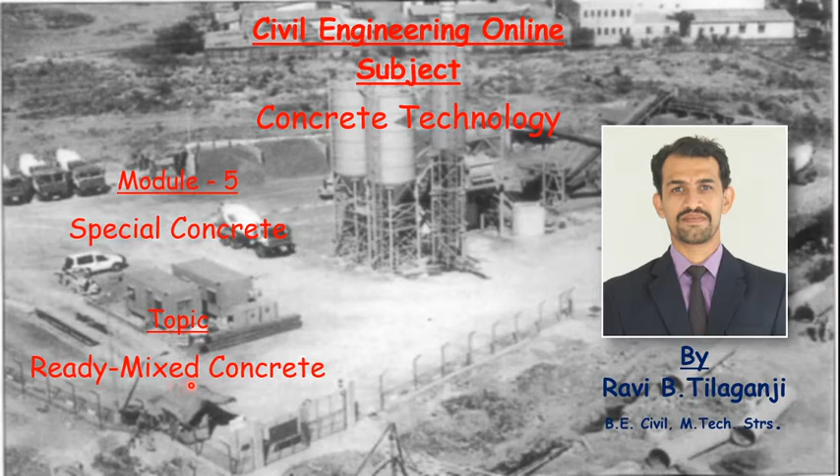Ready mix concrete (RMC) is a specialized material in which cement, aggregate and other ingredients are weigh batched at a plant in a central mixer or truck mixer before delivery to the construction site in a condition ready for placing by the builder. Thus, fresh concrete is manufactured in a plant away from the construction site and transported within the requisite journey time. The RMC supplier provides two services.

Firstly, one of processing the materials for making fresh concrete, and secondly, the transporting of the product within a short time. So, concrete is totally mixed and prepared at the plant only, then it is taken to the site, wherein at the site we have that particular mixer and then we place it at the particular place.

Sometimes materials such as water and some varieties of admixtures can be transit mixed, known as transit mixture, that is they can be added to the concrete at the job site after it is batched to ensure that the specified properties are attained before placement.

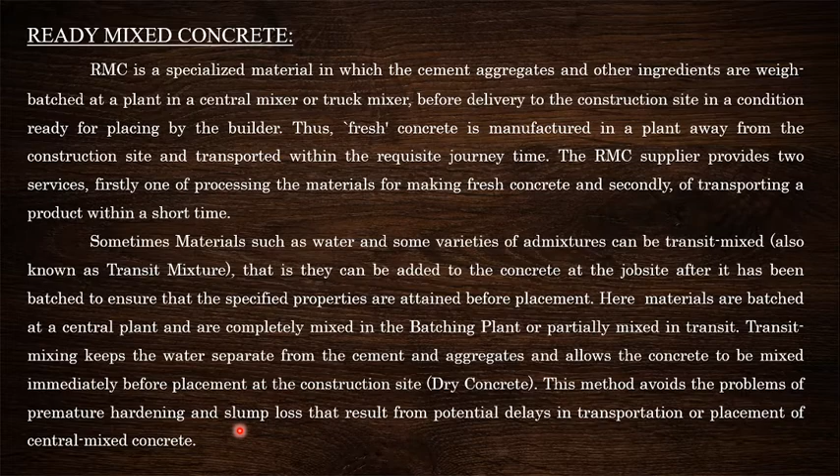Here materials are batched at the central plant and are completely mixed in the batching plant or partially mixed in transit. Transit mixing keeps the water away from the cement and aggregate and allows the concrete to be mixed immediately before placement at the site. This method avoids the problem of premature hardening and slump loss that results from potential delays in transportation or placement of centrally mixed concrete. Transit mixing allows concrete to be hauled to construction sites further away from the plant.

There are several types of RMC plants varying in type of mixing and production capacity. These RMC plants are generally available in capacities varying from 15 cubic meter per hour to 200 cubic meter per hour. A typical RMC plant you are able to see here. This is a transit mixer. Here is the control panel. This is the material feeder.

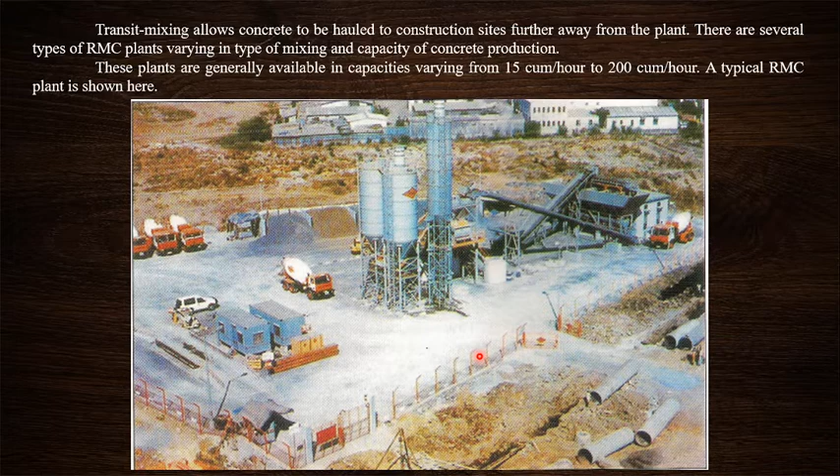Here is the cement, and this is fly ash. Beside it you are able to see the mixing. These are the belt conveyors where the materials are conveyed for mixing, and this is the particular chamber wherein material quantity is available, and from this remote control area the whole batch is controlled and mixing or preparing of concrete is done.

History of ready mix concrete. The idea of ready mix concrete was first introduced by architect Jurgen Heinrich Magens. He got his patent of RMC in Germany in 1903. In 1907, he discovered that the available time for transportation could be prolonged not only by cooling fresh concrete but also by vibrating it during transportation. The first concrete mixed off site and delivered to a construction site was effectively done in Baltimore, United States, in 1913, just before the First World War.

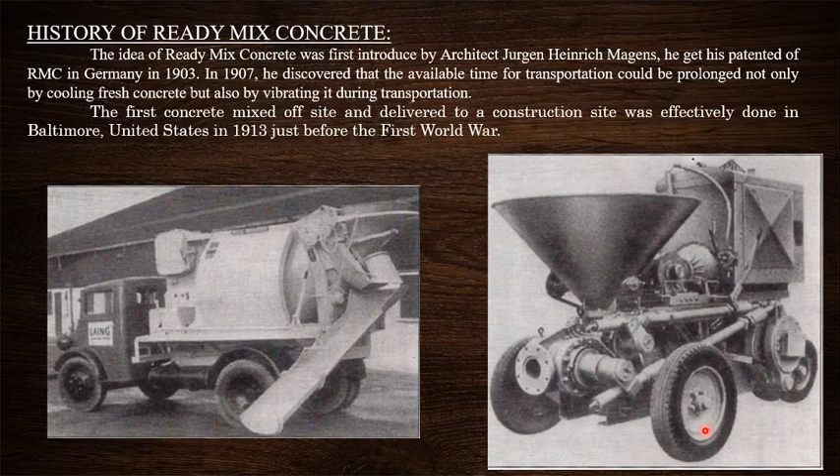So these are the vehicles used as mixers, transit mixers and mixing equipment for ready mix concrete for the first time. In India, ready mix concrete was initially used in 1950 during the construction of dams like Bhakra Nangal and Koyna. At constructions, the transportation of concrete is done either manually or mechanically using ropeways and buckets or conveyors.

Ready mix concrete at Pune in the year 1991. These plants were later allowed to sell ready mix concrete to other projects also. Thus, ready mix concrete was successfully established sometime after 1994 in India. As per the available record up to 2003, there are around 76 RMC plants in 17 cities, having a capacity of around 3875 cubic meter per hour, producing 3.8 million cubic meter of concrete per year.

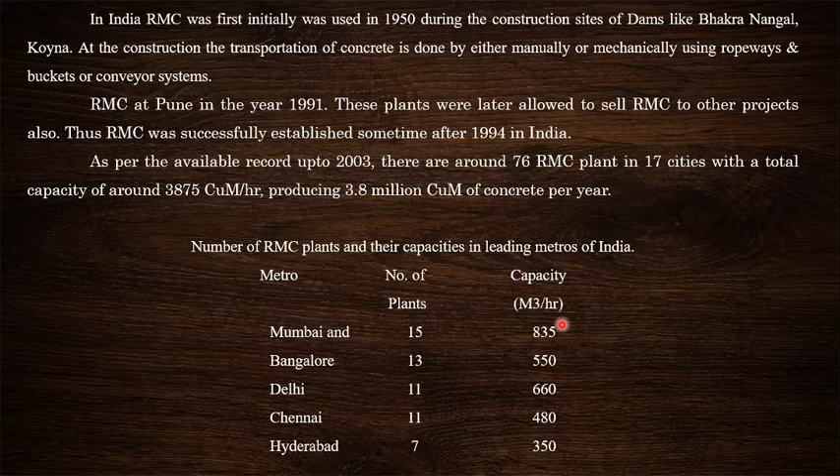So these are some metro cities having ready mix concrete, the number of plants and their capacities, wherein ready mix concrete is available. Still some more have been developed nowadays. We have a number of ready mix plants within distances of about 5 to 10 kilometers.

Use of ready mix concrete. So use of ready mix concrete, how we are going to use it. So the ready mix concrete is prepared at a particular site and we call it a producer plant. So it is not mixed at the site. It has considerably less wastage of material, whereas it has more wastage of material when it is mixed at the site.

Most cities have very little space for storage. For that reason they use ready mix concrete for concreting particular sections, places or construction sites. Obtaining RMC at site can reduce supervision and labor. So usually where labor is not available, we can use RMC, wherein the requirement of labor can be reduced, instead of batching and mixing of the concrete at site.

Many cities and sites house their workforce on the site itself to reduce the time and cost of daily travel. This creates unsafe, unhygienic conditions. So unsafety and unhygienic conditions are there with concrete which is mixed at the site. We can reduce that with the use of ready mix concrete.

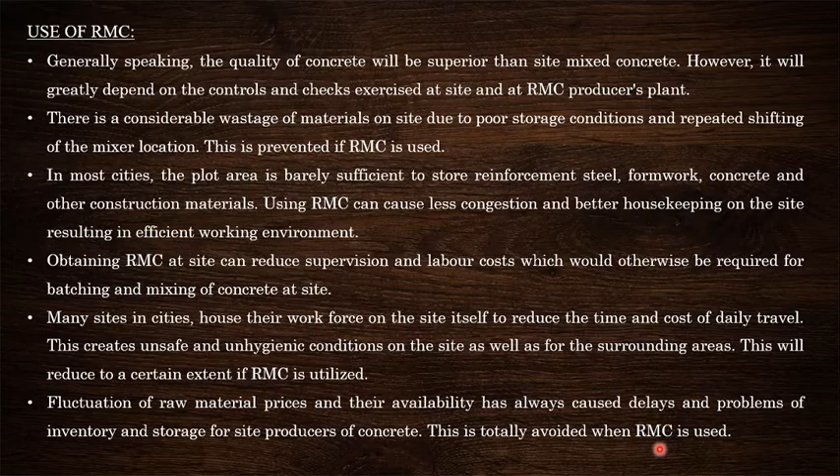Fluctuation of raw materials. Sometimes we have the total amount of material, sometimes we don't have availability of that particular material, so a shortage of material will cause concreting to stop in between. In ready mix concrete that is not going to happen, because the quantity of concrete required is ordered from the producer. Availability of labor gangs, this was already discussed.

Problem of inspection, checking and testing all concrete. We have to check every time. Every time we are not able to get good quality, good quantity of concrete at the site when we are preparing it. But if we prepare at the plants, we are able to have concrete of the same quantity and same quality throughout the whole batch whenever the mix proportion is placed. So concrete is totally controlled: variations, materials, everything.

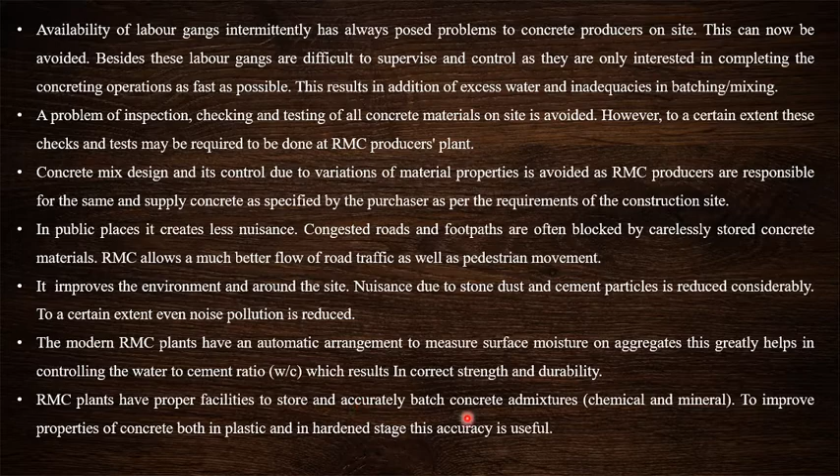Water cement ratio is also controlled, resulting in strength and durability of concrete, and RMC plants have proper facilities to store and accurately batch concrete admixtures, chemicals and minerals to improve properties of concrete both in plastic and in hardened state. This accuracy is very useful.

In general, RMC plants have superior and more accurate batching arrangements than the batchers used on site. Ready mix concrete plants are superior mixers than the rotating drums which are usually used at normal sites. Ready mix concrete plants do batching and mixing efficiently, which cannot be achieved at the site.

Ready mix concrete encourages mechanization and new technologies like pumped concrete, bulk transportation of cement, production of self-compacting concrete, high strength concrete, high performance concrete and so on. New materials like micro silica, fibers and other admixtures are also available in ready mix concrete, which helps with reinforcement, detailing, safety, strength, scaffolding and staging.

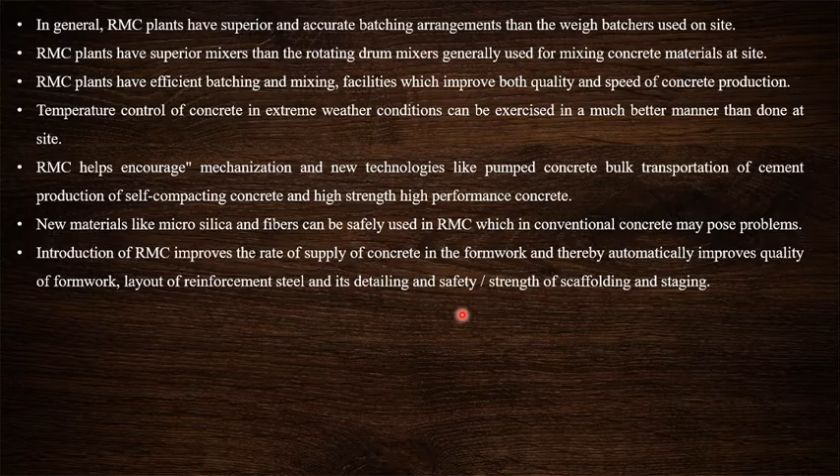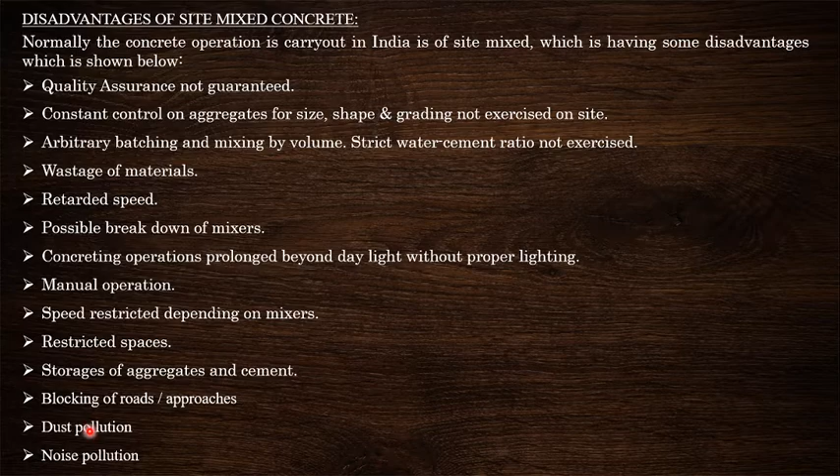Possible breakdown of mixers. Concreting operation prolonged beyond daylight without proper lighting. Manual operation. Speed restricted depending on mixers. Restricted spaces, storage of aggregates and cement, blocking of roads and approaches, dust pollution, noise pollution.

Types of batching plants. In ready mix concrete there are two types of batching plants: centrally mixed concrete or wet batch mixer, and truck mixed concrete or dry batch mixer. In centrally mixed, it is totally prepared at the plant itself, and the wet concrete is taken to the site. Whereas in truck mixed dry batch, the concrete is mixed, water is kept separate, and when it reaches the site, the particular amount of water is added and it is delivered.

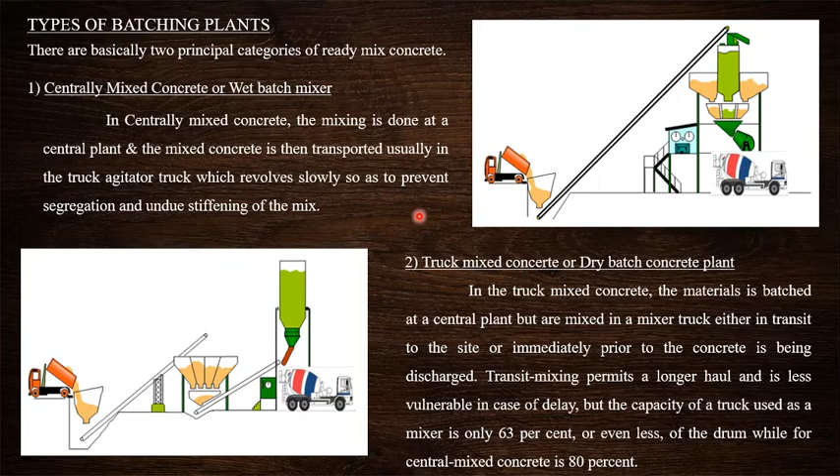63 percent of transit truck capacity is used for the material, and centrally mixed has 80 percent of wet concrete available in the machine. Batching and mixing in the plants covers how we store the material, batching, measuring and recording equipment, mixing equipment, control systems, electrical, hydraulic and pneumatic drives, and conveying systems such as belt or screw conveyors.

Storage of materials. Cement is generally stored in silos. The loading of cement is done with the help of a pneumatic system, either installed on bulk carriers or a separate system available at the plant. If bagged cement is used, then the cement is loaded using a compressed air loader and a splitter unit.

Cement is weighed separately and is transported from the silo into a mechanical or electromechanical weigher by means of a screw conveyor. Here we can see one of the cement conveyors. This is the pumped cement part. We can clearly see this is the Ambuja cement vehicle.

Water is generally stored in tanks located close to the plant. It is accurately measured by a water gauge and microprocessor control system. Consistency of a mix is generally checked by visual observation, later confirmed with a workability test like the slump test. However, in modern plants, consistency of the concrete mix is checked by an automatic remote recording system, which is easy and more accurate.

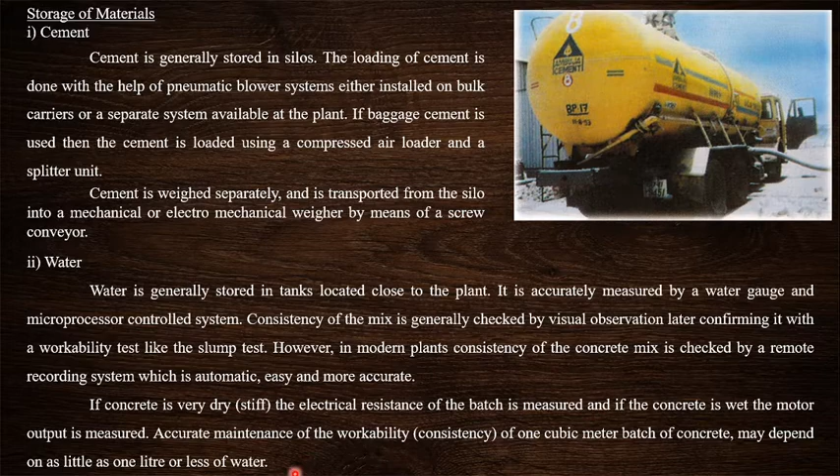If concrete is very dry and stiff, the electrical resistance of the batch is measured, and if the concrete is wet, the motor output is measured. Accurate maintenance of workability consistency of a 1 cubic meter batch of concrete may depend on as little as 1 liter or less of water.

Aggregates. The storage of aggregates is done in various ways depending on the type of plant. There are basically three types of plants generally in use. Vertical production: in vertical production, aggregates are stored above the batching and mixing elements in one or more silos. These plants are not suitable for relocation at short intervals of time. As the aggregates are stored in the silos, it is relatively easy to protect the aggregates from very low temperature in the winter period.

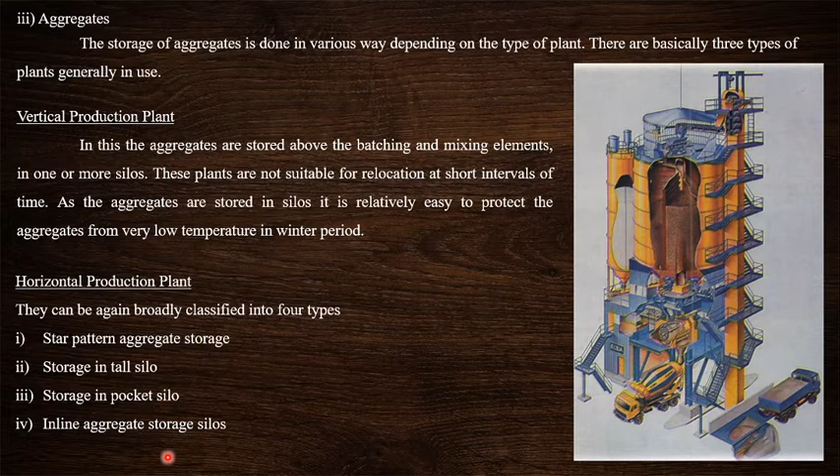The star bin storage of aggregates is most popular in India, basically because of climate conditions. The aggregates can be stored exposed to ambient temperature in different compartments forming a star type of pattern. A storage capacity of 1500 cubic meters is possible in this type. In the star pattern, aggregates are stored in 4 to 6 compartments. So in a star, how many compartments do we have? Usually 5 compartments, so 5 aggregate sizes are used. So minimum 4 to 6 compartments are made and they are stored.

They are bulked at a 45 degree flow angle against the batching plant's bulkhead and partition wall of the compartments using a boom type dragline loader. So there is a central pyramid, and the pyramid shape edges separate it, so we are able to have a 4-star type storage. Dragline operation is done either fully manually, semi-automatically or fully automatically, with fully automatic dragline loader systems.

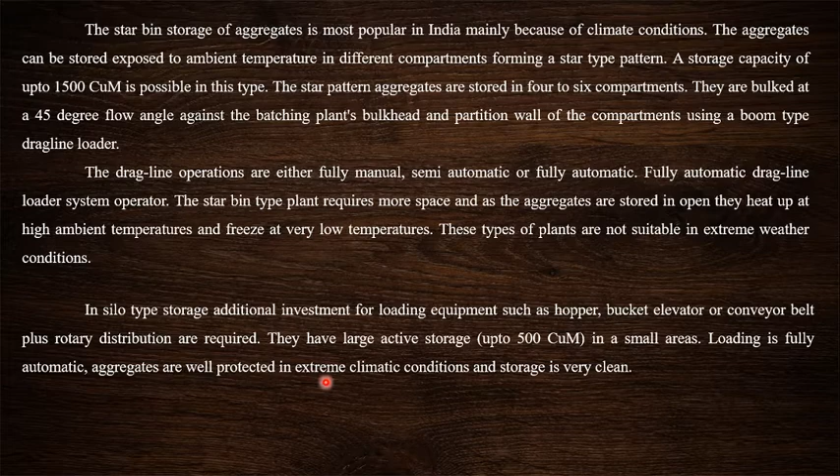The star bin plants require more space, and as the aggregates are stored in the open, they heat up at ambient temperature and freeze at very low temperature. This type of plant is not suitable in extreme weather conditions. In the silo type, additional investment in loading equipment such as hopper, bucket elevator and conveyor belt plus rotary distribution is required. They have large active storage up to 500 cubic meters in small areas. Loading is fully automatic, aggregates are well protected in extreme climatic conditions and storage is very clean.

Mixing arrangements: there are various types of concrete mixers used on the concrete production plant. The two basic types are free fall mixers and power mixers. Most of our indigenously manufactured plants have free fall mixers only. Free fall mixers consist of a rotating drum with blades fixed on the drum's interior. As the drum rotates, the material inside is lifted and dropped. The drum is loaded and emptied by changing the direction of rotation or by tipping it.

Most of the imported plants have power mixers. A power mixer sets the material in motion positively. The materials get thoroughly mixed by rotating arms. These mixers have shorter mixing time and give better homogeneity, consistency and strength to the concrete. Besides, they have better facility for inspection. The following are the most common designs.

On the left side is the blade mixer arrangement. So this is the single shaft drum and this is the double shaft drum, wherein double mixing blades are provided, and here single mixing blades are provided. Usually we see this type of drum at normal concreting sites, and the other type we see at sites where the most important works are going on.

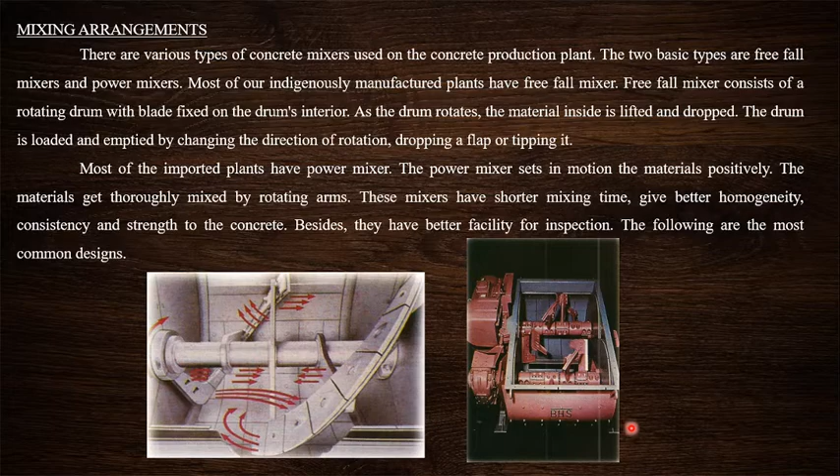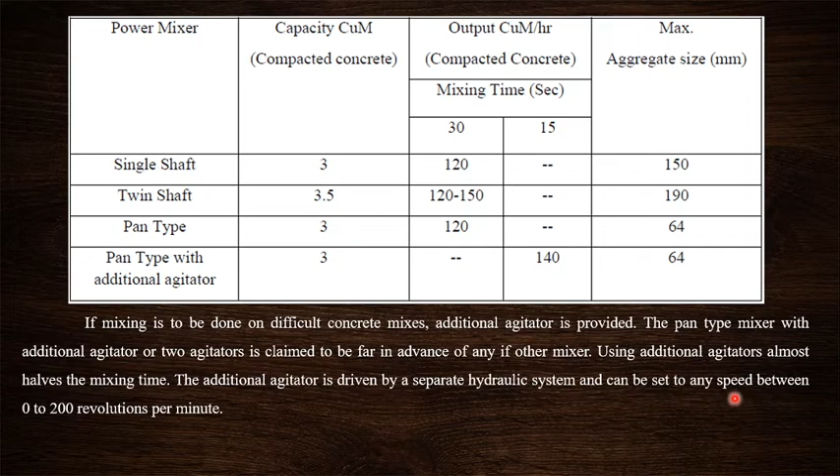If mixing is to be done on a difficult concrete mix, an additional agitator is provided. The pan type mixer with an additional agitator or two agitators is claimed to be far in advance of other mixers. Using additional agitators almost halves the mixing time. The additional agitator is driven by a separate hydraulic system and can be set to any speed between 0 and 200 revolutions per minute.

Control systems: these are the control systems which we are using at the plants for better quality control, higher economy and superior working conditions. Fully automatic plant control systems with multiple inputs of 120 mixes or template control systems are used. These controls are operated from the main desk. It also has a material availability monitor, printer plus additional batching monitor, and the entire plant can be operated by

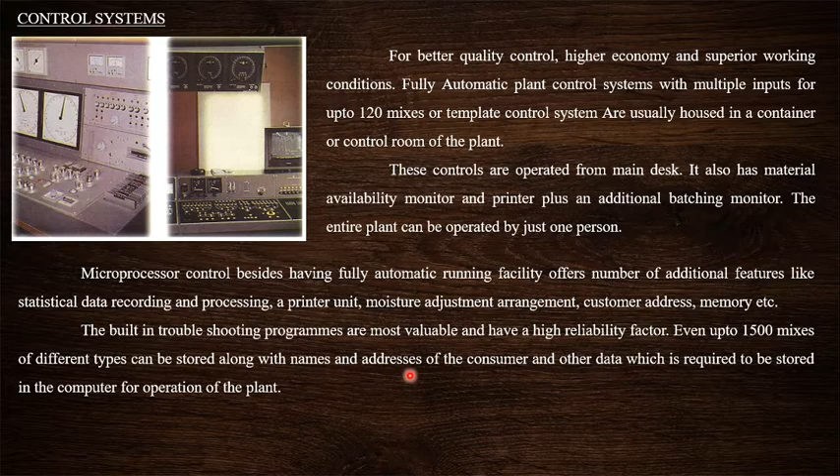just one person. Microprocessor control, besides having fully automatic running facilities, offers a number of additional features like statistical data recording and processing, a printer unit, moisture adjustment arrangement, customer address memory; everything can be done. The built-in troubleshooting programs are invaluable and have a highly reliable factor. Up to 1500 different mixes can be stored along with names, addresses of consumers and other data which is required to be stored in the computer for operation of the plant.

Transportation equipment: the transit mixer is one of the transportation equipments. The transit mixer is one of the most popular equipments out of several models available in India. A number of transit mixers are in use all over the country, which are mainly mounted on Indian truck chassis. The mixer drum is either manufactured in India or imported. However, in general, the hydraulic system is imported. Normal capacity 4 to 12 cubic meters. Hydraulic drive of mixer is by separate engine or driven by truck engine. Water tank capacity 192 to 2000 liters.

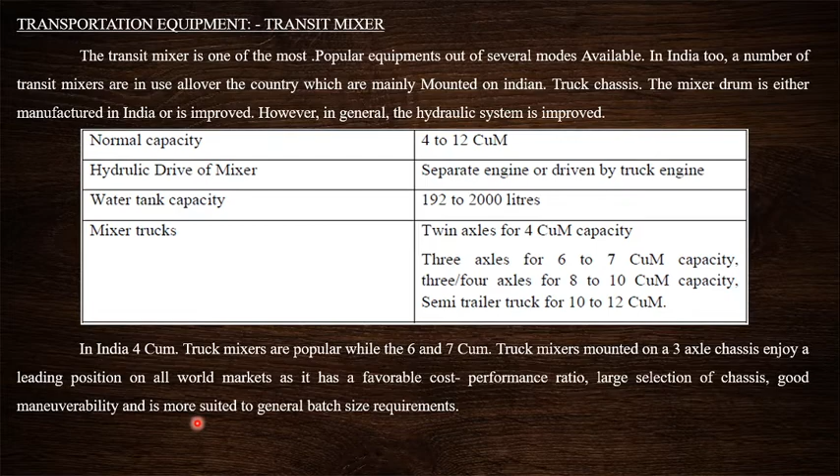Mixer trucks: twin axle of 4 cubic meter capacity, 3 axle of 6 to 7 cubic meter capacity, 4 axles of 8 to 10 cubic meter capacity, semi-trailer truck of 10 to 12. In India, 4 cubic meter truck mixers are popular, while the 6 or 7 cubic meter truck mixers mounted on a 3 axle chassis enjoy a leading position on all world markets as it has favorable cost performance, large selection of chassis, good maneuverability, and is most suited to general batch size requirements.

So these are the transit mixers which we have almost all seen somewhere on the roads. These are particular transit mixers. Some are agitators, some are transit mixers. Quality aspect: sampling of concrete according to IS 4926:2003. After the truck mixer has remixed its delivery on site, allow at least the first 1/3 of 1 cubic meter of concrete to be discharged prior to taking any samples. Take at least 4 incremental samples from the remainder of the load, avoiding sampling the last cubic meter of concrete. Thoroughly remix this composite sample either on a mixing tray or in the sampling bucket and proceed with the required testing.

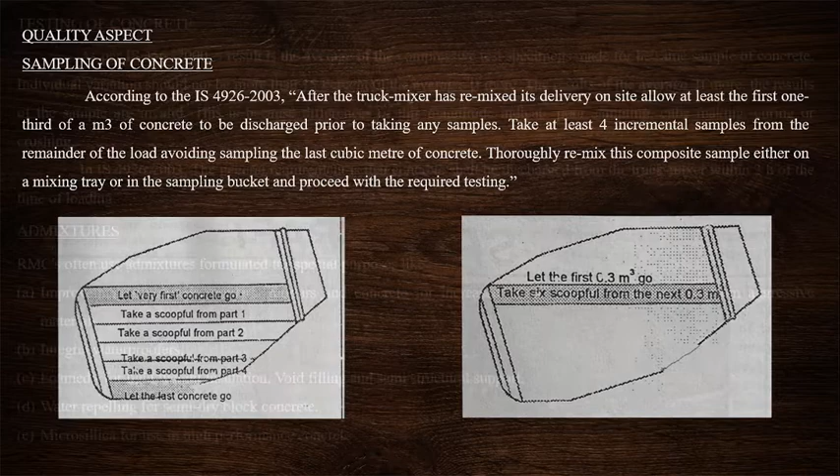So testing of concrete as per IS 456: a result is the average of the compressive strength of three specimens made from the same sample of concrete. Individual variation should not be more than 15% of the average. If more, the results of the sample are invalid. So in this sentence, individual variation should not be more than 15% of the average. If more, the results of the sample are invalid. This is because differences of this magnitude indicate poor sampling, cube making, curing and crushing.

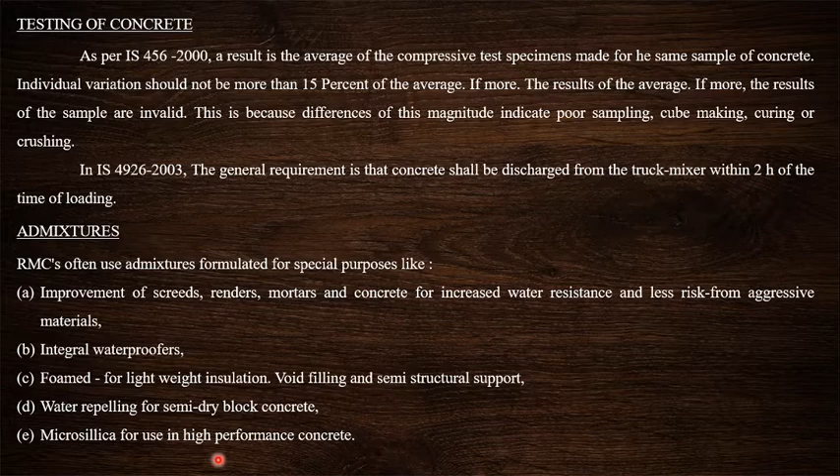In IS 4926:2003, the general requirement is that concrete shall be discharged from the truck mixer within 2 hours of the time of loading. So this also comes into the transit mixer operations. Admixtures can be used in the RMC: improved screeds, renders, mortars and concrete for increased water resistance and less risk from aggressive materials. Integral waterproofers, foamed concrete for lightweight insulation, void filling and semi-structural support. Water repellents for semi-dry block concrete. Micro silica for use in high performance concrete can be used.

Thank you so much for listening patiently. The special concrete part is totally completed.